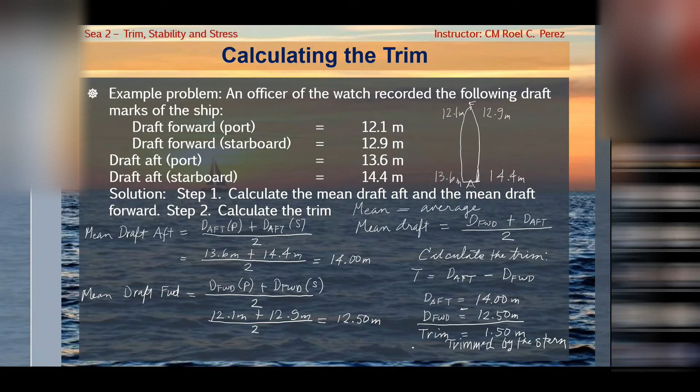Okay, so pag sinabi mong trim by the stern, the draft aft is greater than the forward draft, and you have a positive trim. So those are the indicators. And for trim by the head, that is negative trim, and the forward draft is greater than the aft draft. Okay, if the aft draft is equal to the forward draft, that is called even keel. Even keel or EK.

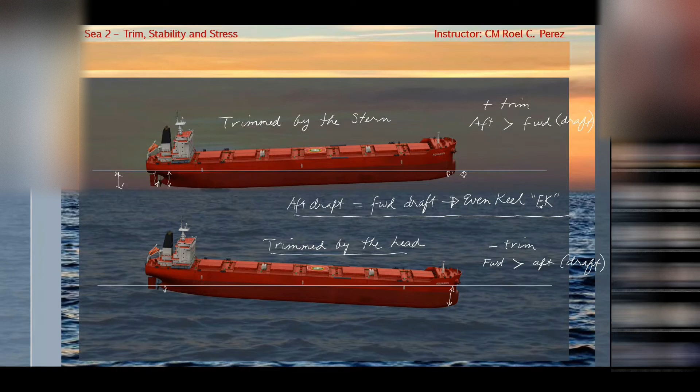Okay, next is change of trim. If a weight is shifted longitudinally, a change of trim will occur, no? For example, dito, no? Pag sinabi mo longitudinal, if you remember kasi yung ating transverse, no? Kung galing dito, papunta ka doon, that is transverse shift, di ba? So here, it is different. This one will involve trim, and also, this is longitudinal. Ibig sabihin, if this is your vessel, meron kang cargo dito, or weight, and then you will shift it to forward, so that is longitudinal.

So example 1. A ship floats at draft forward of 10 meters and draft aft of 10.3 meters. So kung nakita mo, 10 meters saka 10.3, mas malalim yung draft aft. So this is trimmed by the stern, no? When a weight is shifted forward, ito, ganito, no? This is your weight to be shifted forward. So what will happen? Siyempre dito, tataas. Dito naman bababa.

Okay, the final draft. So after shifting, the final draft is 11.2 meters draft forward and draft aft is 11.4. So trim by the stern pa rin pero nabawasan. Kasi nga, umakyat dito kasi tinanggal mo yung weight. Aakyat yan. And then dinagdag mo doon, so bibigat naman doon. Bababa. So what is the change of trim that has occurred?

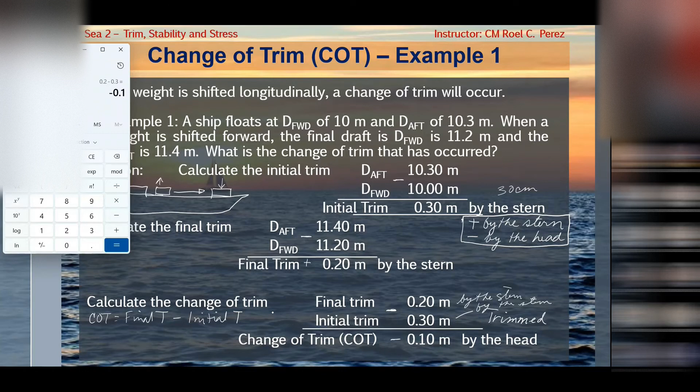So ganito siya, nakasubsob yung iyong barko, no? And then you have a weight there to be shifted to the aft part. So mangyayari ngayon, aangat dito, tapos dito lulubog. So it's either mabawasan yung trim or magiging trim by the stern. Depende, no? But surely the change of trim will be positive.

Positive or by the stern. Kasi lilipat ko doon siyempre by the stern. No? Okay, so calculate the initial trim, that is draft aft 9.4 meters minus draft forward 10 meters, that is your initial trim is negative 0.60 meters. That is by the head, di ba? Kasi mas malalim yung forward and negative.

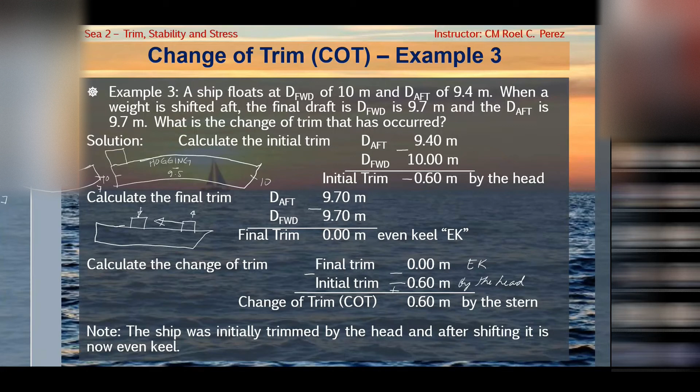Let's try this exercise. I will give you 10 minutes. Then, saka natin subukan. Okay, so let's try to answer. Okay, so, what is step 1? That is, nakita niyo, step 1 is to calculate the initial trim, di ba? Initial trim.

So, initial trim is the draft aft minus draft forward. That is your initial trim. Okay, so ano yung draft aft natin? That is 9.4 meters, no? 9.40 meters minus 10 meters. That is equal to 0.60 meters. Negative. So that is by the stern, no? Ay, by the head. That is by the head, no?

Okay, so next, your final draft. Okay, draft aft. That is equal to, okay, draft forward. Lagay ba natin format. And then this will be your final trim, which is, okay, so ang draft aft natin, that is 9.7. Okay. 9.7 meters. Pareho dito kanina. 9.7 meters, no? So this is even keel, no? 0.00 meters. This is even keel.

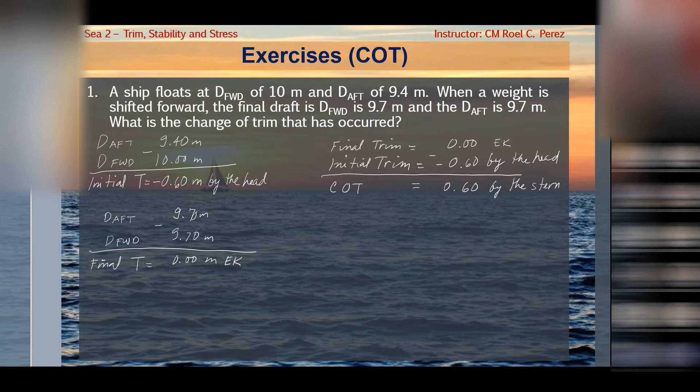Di ba? Di ba pareho rin yata, di ba? Okay, so saan ang diferensya ng isa? Parang ganun din yung example natin, baka hindi ko na yata na-delete. Oo nga. The only difference is shifted forward, sabi niya, no? Okay, let's go to number 2.

So, a ship floats draft forward 11.2 and draft aft 11.8. So that is trimmed by the stern. When a weight is shifted forward, okay, so pwede i-drawing muna natin, ano? So, konti lang diferensya, no? Tapos, yung weight will be shifted forward. So, ibig sabihin, nandito siya, somewhere here, papunta siya doon, ano? So, makita mo dito, lalalim, dito naman, bababaw, no? Okay, and then your final draft will be 11.8 and 12.1. What is the change of trim that has occurred?

Okay, ganun din, ano? Draft aft, which is 11.80 meters. Okay, bakit 80? Pero pareho naman siya yung 8. Pareho na. So, bakit? Because pagka may 0 kasi yan, that is understood na alam mo kagad that this is equal to 80 centimeters, di ba? 11 meters and 80 centimeters. Kaya laging ganyan, although minsan mayroong another 0, ano? 3 decimal. Pero normally, pagka-draft, that is supposed to be only 2 decimals. Pero, di ba sabi ko naman sa inyo, may pwedeng 1/2. So, let's say 11.805, no? Pwede rin yun, ano?

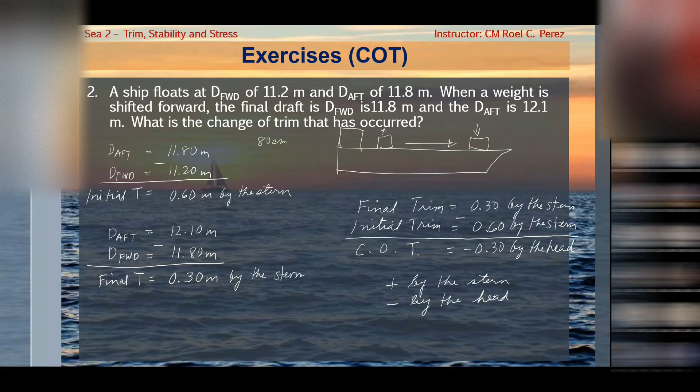Okay, di ba? Dito madali kasi tignan mo lang yung mas malalim. Pero dito naman, hindi mo pwedeng tignan yung mas malalim dito. No? The indication here is, doon ka nag-shift kasi sa forward, kaya lalalim doon. Yan ang indication. That's why here, it is better to use yung aking system, which is positive is by the stern, and negative is by the head. Okay, so let's go to the next.

Okay, so effect of shifting weight longitudinally. This is para maintindihan nyo yung next natin, yung MCTC, which is moment to change trim by 1 centimeter.

Consider the ship below to be on an even keel now and has a weight on deck on the forward part. G here is the longitudinal center of gravity, that is LCG.

If you remember yung ating sa transverse is VCG, di ba? Vertical center of gravity, which is the reference point is yung keel. Keel ang reference point, that is VCG. Pero yung LCG, ang reference point natin, and almost all calculations, ang reference point natin is the aft perpendicular dito. If you remember yung aft perpendicular. Kahit yung LCF, LCG, so your reference point is ito siya.

Yan, that is called LCG. And your reference point is aft perpendicular, which is, ang tawag dyan is FOAP. Ano ba yung FOAP? Ang ibig sabihin ng FOAP, although meron din ako mamaya doon. This is forward of aft perpendicular. Nakita mo, FOAP. Forward of aft perpendicular, kaya that is FOAP. That is how they measure.

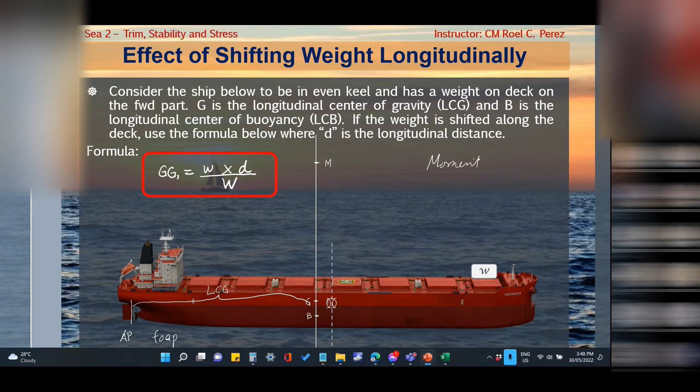Okay, if the weight is shifted along the deck, use the formula below where D is the longitudinal distance. Ang formula natin is G to G sub 1. Pag nag-shift ka ito, for example, dadalhin natin doon, which is on the other side na lang, your G also will shift to the other side. G to G sub 1, that is weight times distance divided by displacement. And remember that weight times distance is moment. Moment is equal to weight times distance.

Okay, consider the rule in shifting, that is, the shift of the center of gravity will move parallel to and in the same direction as the shift of the weight. Nakita mo dito, this is your weight that is shifted aft. Siyempre, meron siyang center of gravity doon sa gitna. Tapos, nilipat doon sa center of gravity, the new center of gravity dito. It will follow, your center of gravity of the vessel will follow, in parallel and in the same direction. So, nakita mo, this is G to G sub 1.

Okay, this will cause the ship to trim to the stern until the center of buoyancy will move to the new center of buoyancy. So it separates from the center of buoyancy first, then when the vessel is already trimmed, the center of buoyancy will also follow.

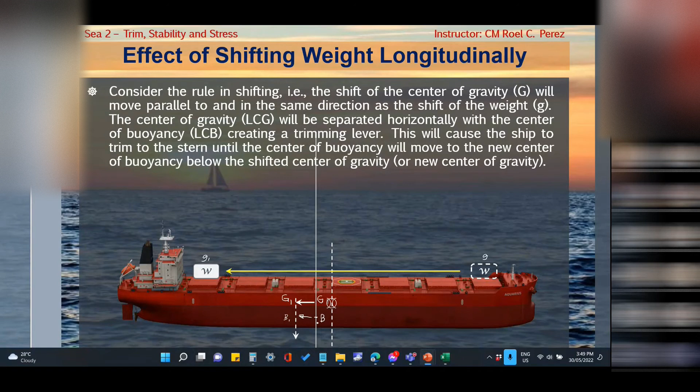Okay, because we shifted the weight, the shifting of the weight will cause trim to the vessel. And because there is trim, there is also theta, or an angle. Here, your M sub L is your longitudinal metacenter. And GML, from the center of gravity, the original initial center of gravity, to the M sub L, is your GM sub L, which is the longitudinal metacentric height.

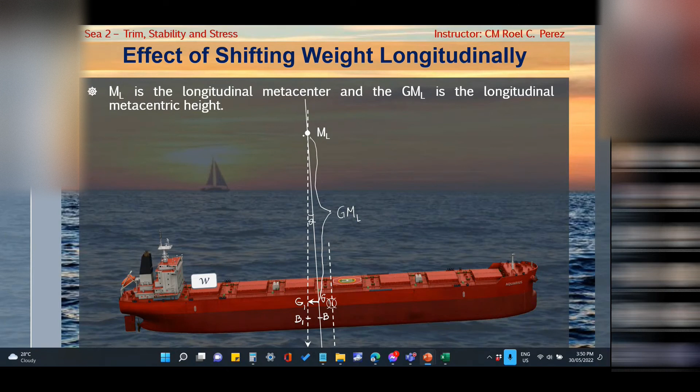Later, we will form a triangle, from G to G sub 1 and also M sub L, which I will explain later.

Okay, so let's go to the moment to change trim by 1 centimeter, MCTC. It is the trimming moment required to change the trim by 1 centimeter.

MCTC is tabulated in the ship's hydrostatic data or hydrostatic tables, and your entering argument is of course the draft. Each tabulated draft has a corresponding MCTC.

It is used to obtain the change of trim when weights are shifted, loaded, or discharged. It is used in the draft survey for the calculation of the amount of cargo that is loaded or discharged to or from the vessel.

The change of trim can be calculated using the formula: change of trim in centimeters equals trimming moment divided by MCTC, which is the moment to change the trim by 1 centimeter. It's similar to TPC, if you remember the TPC.

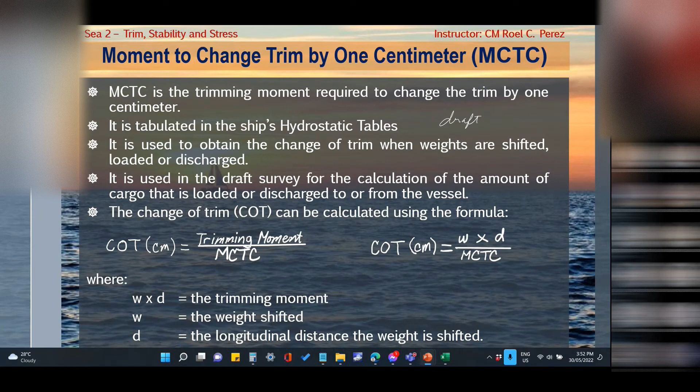Example 1, MCTC. A cargo on deck weighing 400 tons is shifted aft by a distance of 46 meters. If the MCTC for the current draft is 1,415.4 tons-meter, calculate the final trim of the vessel if the initial trim was 0.25 meters by the stern.

Okay, so here's the solution. I have a rule here for shifting: it is better that we use positive for distance shifted by the stern, and for shifting forward, that is negative for distance.

Which will give you the result: positive for by the stern, and negative for by the head. Okay, let's lay out the formula: change of trim equals weight times distance over MCTC.

So we are going to shift 400 tons, 46 meters by aft, so that is positive, divided by the MCTC. Let me show you the calculator: 400 times 46 positive divided by 1415.4 equals, and you see that is rounded off to 13.0 centimeters.

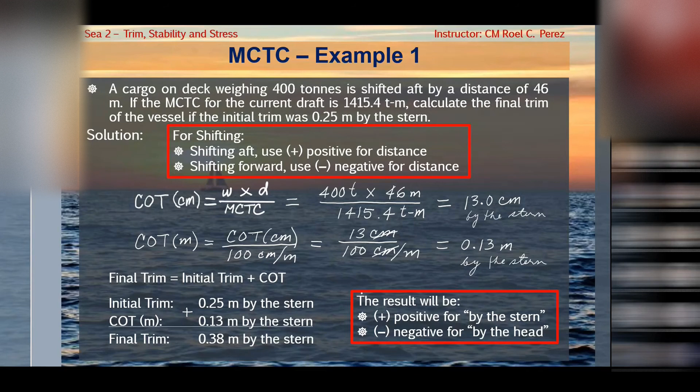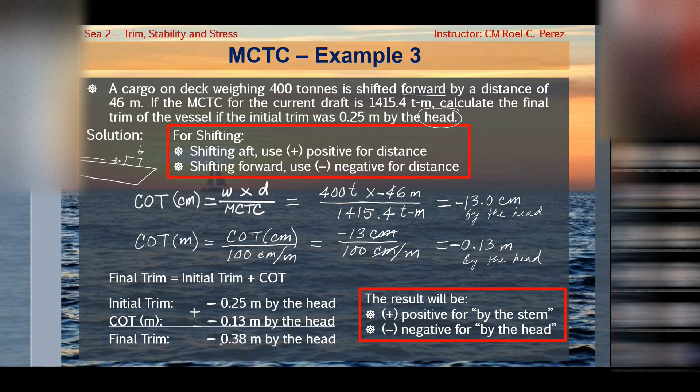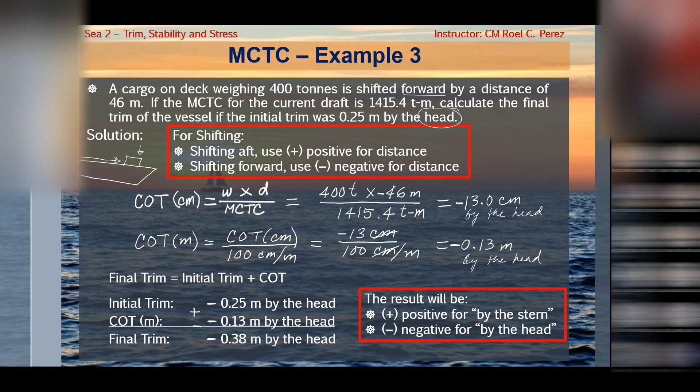Okay, any question? So if you do not like to follow my rule, shifting aft positive and shifting forward negative, pwede rin naman yan, kasi ma-determine mo naman dito, that is 13 centimeters, determine mo na lang na by the head, and then dito bahala ka na lang mag-analyze. Kaya ko tinuturo yun dito because of yung programming, para mas madali, pakita mo na yung result eh. That is negative is by the head and positive is by the stern.

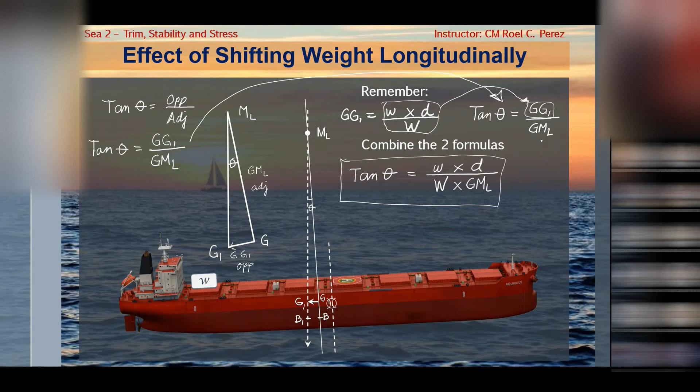And remember also that we have a formula for G to G sub 1, which is equal to weight times distance over displacement. Now, if we combine the two formulas, itong formula ng G to G sub 1, ipalit lang natin dito. So if we merge the formula, this is the result: weight times distance over displacement times your GM sub L. Okay, so next. Hindi pa tayo tapos until we derive the formula for MCTC.

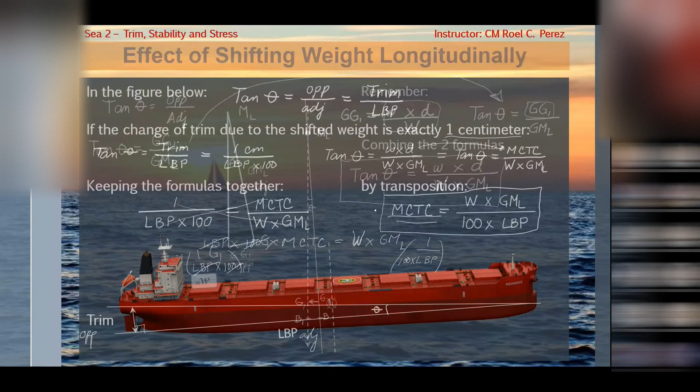In the figure below, tangent theta is equal to the opposite side over adjacent, that is trim divided by LBP. Nakita mo, meron tayong angle dito, and this is your trim. This level is actually your draft forward, although hindi lang siya ganun ka-accurate, and this level is your draft aft. The difference between them is the trim, so that is your opposite side. And your length between perpendiculars, kasi the calculation will always be at the perpendiculars, so your LBP will be your adjacent side.

So meron na tayong formula ulit. Dalawa na yun. Ito yung galing sa previous slide, this one, and this is this one. If the change of trim due to the shifted weight is exactly 1 centimeter, then your formula will be transformed. Tangent theta is equal to 1 centimeter divided by LBP times 100. Kasi nga 1 centimeter eh, so i-convert din natin yung LBP mo by 100.

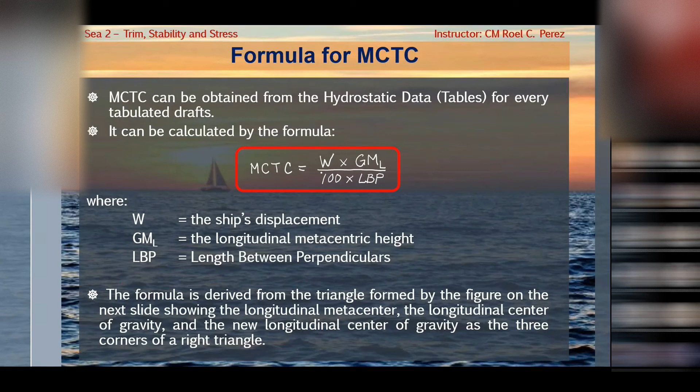Nakancel na natin. MCTC now will be weight, displacement times GM sub L divided by 100 times LBP. Yan na. If you remember yung formula kanina, ito na yun. Okay, punta tayo doon para makita. MCTC now is displacement times GML or GM sub L divided by 100 times LBP.

So yan, ganyan natin ma-derive yung formula for MCTC, no? Pero this is only to show you, para kung tanungin ka, paano nakuha, you can derive the formula. But of course, your MCTC is already tabulated. Meron na tayong hydrostatic tables.

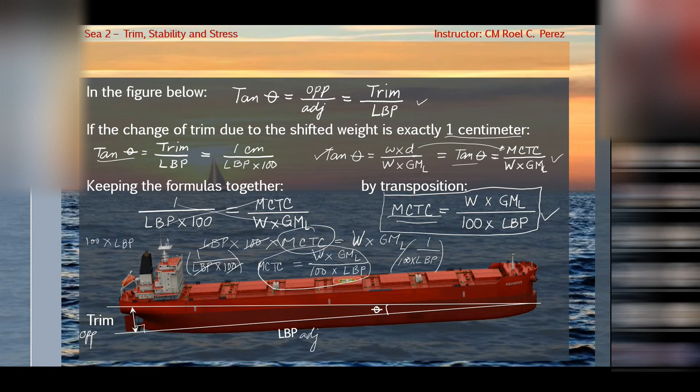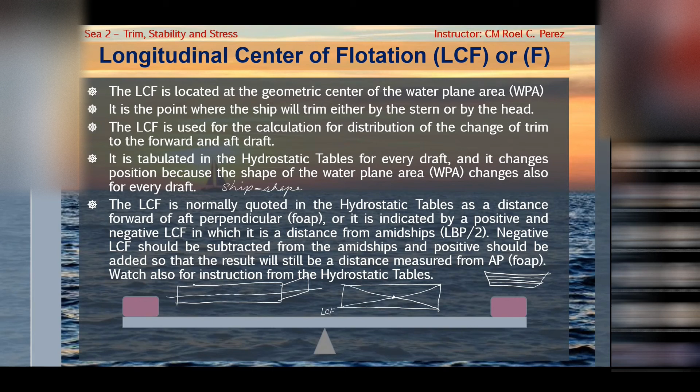Baka iba yung method doon. I'm not sure, that's why dinagdag ko to, watch for instruction from the hydrostatic tables. Basahin mo kung ano yung instruction doon para sigurado. Pero normally, pagka negative, should be subtracted from the amidships, which is LBP over 2, and yung positive will be added. Okay, later I will explain to you. Nakita mo, this is your LCF.

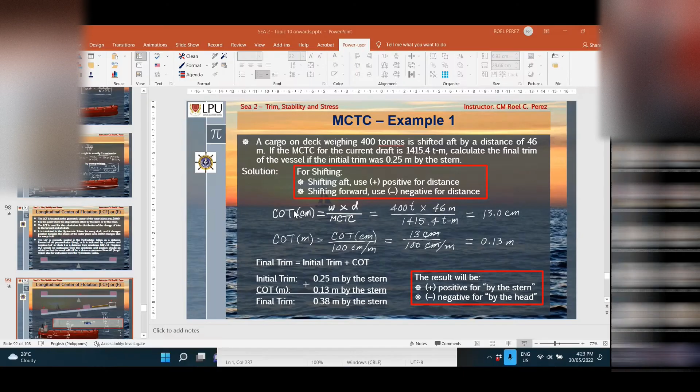So yan. If you're going to transfer this, katulad ito, going to transfer this there. This is your LCF. So nakita mo, dito yung this part will go up and this part will go down. Ayan. Okay, para maintindihan nyo, tanggalin ko muna ito, no? Yan, ha?

Okay, so sabi ko kanina, that is measured from your foap. Kaya kung ito yung, okay, this is your aft perpendicular. Ngayon, kung ang LCF mo nandito, let's say this is your LCF. Tapos yung midship mo is somewhere here. Remember that your LCF should be this one, no? Nandito banda yung LCF mo. This is your LCF, and this is measured forward of aft perpendicular. foap, no? Doon ang measurement.

Kaya kung makita mo sa table yan, ganito, no? LCF, sometimes nandito sa tabi niya yung foap. Sometimes wala pero understood, nandun sa mga instruction. For example, 5.0 draft, that is equal to LCF of, let's say, 40 meters. And then let's say 5.1, 5.2, lulubog, so lalaki. Exaggerate na lang natin, 41 meters. Equal yun, hindi minus. Let's say this is 42 meters. Dahil sabi ko nga, that is table. So lagyan natin ng table para understood.

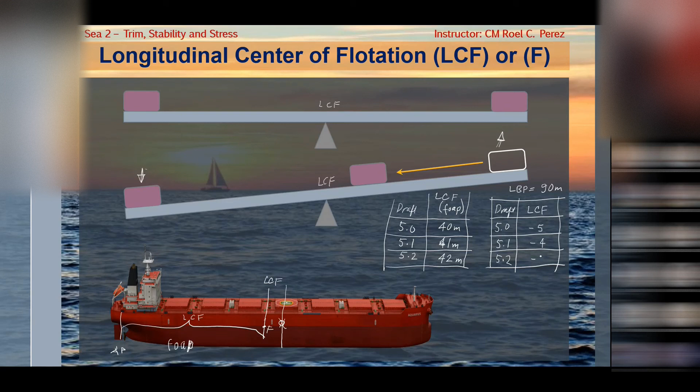Okay, so this is your draft. This is your LCF. So that is the most common LCF, no? Pero malilito ka, minsan may ganito. Draft, LCF. Let's say that the LBP is 90 meters. Tapos ito yung barko mo. Makita mo dito sa LCF, instead of 40 meters is negative 5. Dito naman negative 4, dito negative 3. O di ba nakakalito?

Although these are the same, no? Ganito lang naman yan eh. I-apply mo yan, LBP over 2, that is 90 over 2 is equal to 45 meters. Tapos i-apply mo ngayon yung LCF mo, that is negative 5. So makita mo, this is 40 meters, the same with the foap. Kita mo? Para may idea na kayo, para pag kayo na yung chief mate doon, or even junior officer, hindi ka magugulat. Paano mo i-apply?

And as you can see, this is also measured. Nakita mo yung LBP kasi is length between perpendiculars. Ito yung forward perpendicular mo. Hirap ko sa ilalim magsulat, hindi makontrol. Okay, dito na lang. Forward perpendicular. So yung dalawang yan, divide mo by two, that is your amidships. Kaya katulad nito, if yung LBP mo is 90 meters, siyempre yung midship mo is 45, di ba?

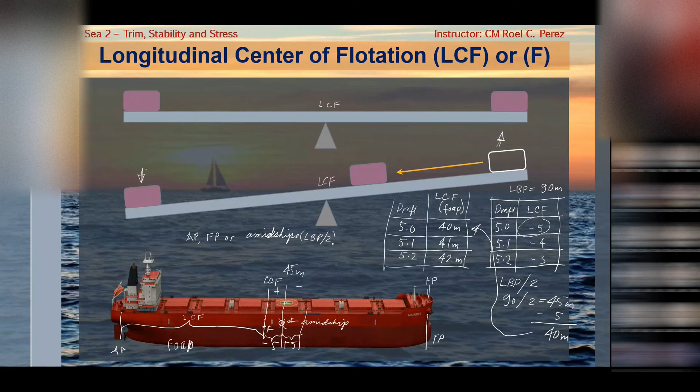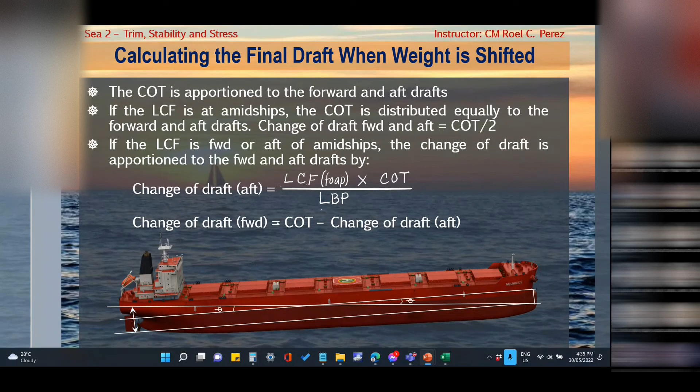So this is your change of trim. Tapos yung theta mo dito, which is equal doon, and syempre equal din doon. So kinuha lang natin sa gitna yun. And this will be your center of flotation. Then this one will be your change of draft, dito change of draft din dito sa kabila.

So tangent theta is equal to change of trim over LBP. Alam niyo na yung LBP dito, di ba? This is LBP, mula dito hanggang doon. And then tangent theta is equal to change of draft over LCF foap. So foap galing dito. This will be your LCF.

Let's compare the two formulas. Since both have tangent, pwede na natin tanggalin yon. Then your change of trim over LBP is equal to change of draft over LCF foap. We can transform the formula, so cross multiply natin: change of draft times LBP is equal to LCF foap times change of trim.

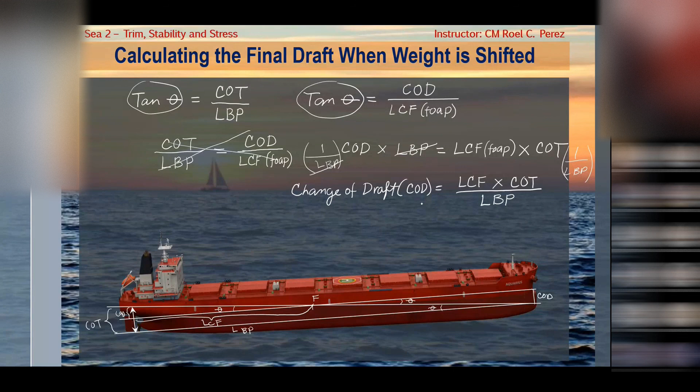So, subukan natin kung tama na. Change of draft is equal to LCF FOAP times change of trim over LBP. Anong LCF natin? That is 68 meters times ang ating change of trim is negative 16, divided by your LBP, which is 150 meters.

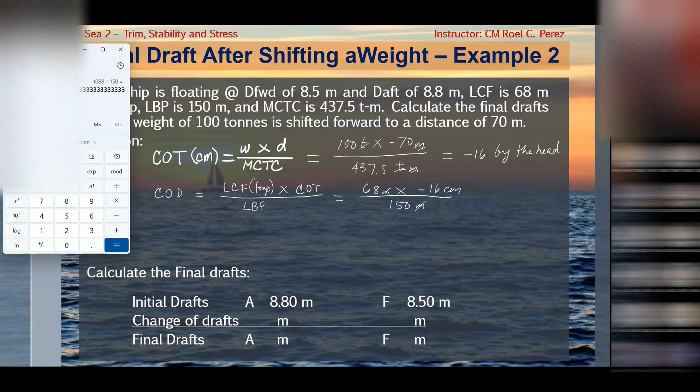This one is 16 centimeters rather. Kasi cancel na tayo doon. So dito, dahil cancel ka na rin, what will remain will be centimeters. Okay, 68 times 16 negative divided by 150. Nakita mo 7, that is minus 7 centimeters, which is 0.07 meters.

This is change of draft aft. But for change of draft forward, that is equal to change of trim minus change of draft aft. So that is negative 16 minus negative 7, that is plus. Negative saka plus, negative pa rin yun, that is negative 9 centimeters. Mali pala ako, hindi pala meters kundi centimeters. So this will be 0.09 meters, negative.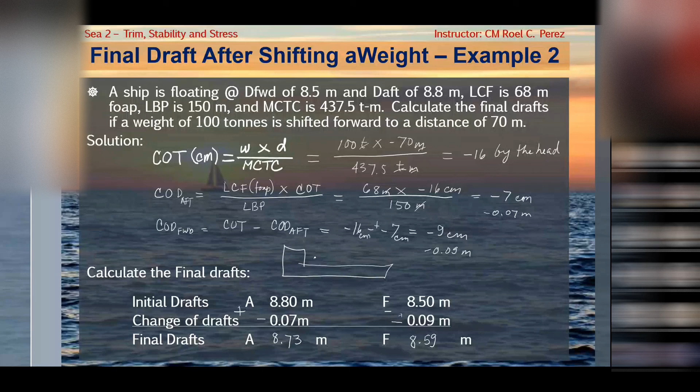Okay, so kung hindi nyo maintindihan, just analyze with the drawing. You are shifting to forward. Pag nag-shift ka forward, this will go down, the stern will go up. Kaya dito magpa-plus ka dahil lulubog. This one naman, lulutang siya, so mag-minus ka. Mas madali yun. Of course, it is always easier to go back to the figure.